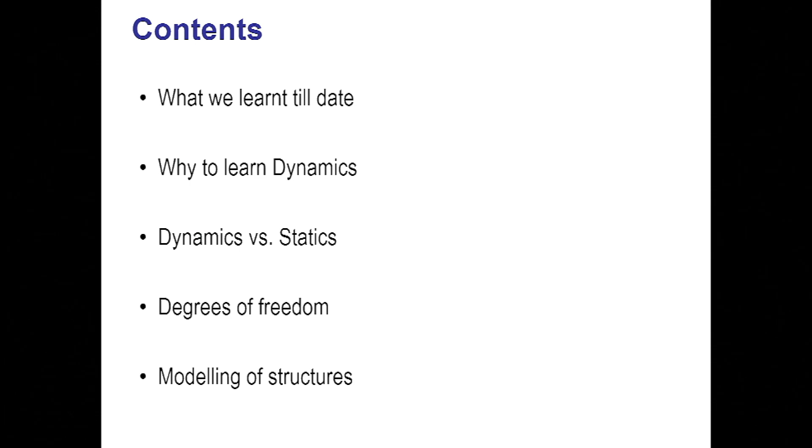Today I am going to cover an introductory topic on structural dynamics. My presentation has the following contents: what we have learned till date, why to learn dynamics, what is the difference between dynamics and statics, what is meant by degrees of freedom, and in the end we will try to cover modeling of the structures. Let us start with what we have learned till date.

Basically structural engineering is divided into two different areas: one is subjects related to analysis, second is subjects related to design. In structural analysis we have learned these many subjects in our UG program, like engineering mechanics, strength of material or mechanics of material, structural analysis 1, structural analysis 2, or in many universities called theory of structures 1 and 2. Then we have learned matrix methods of structural analysis, and then advanced structural analysis.

So after learning so many subjects related to analysis, why do we want to learn another subject related to dynamics, which is also an analysis subject now? Let us see what we have learned in various subjects first, and then we will come to know why there is a need to learn this new subject.

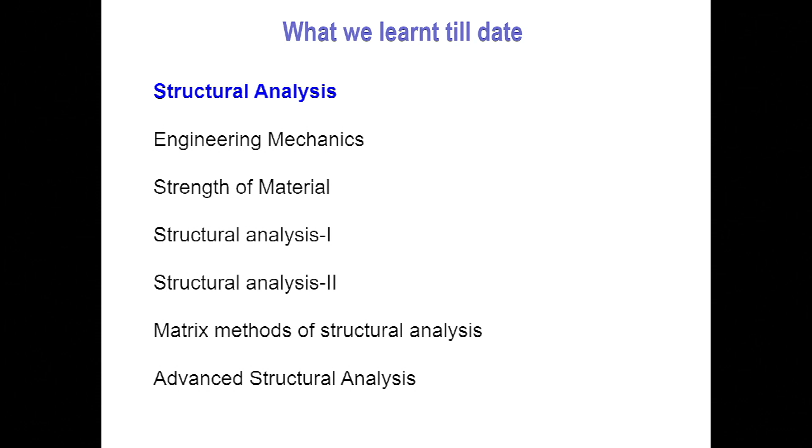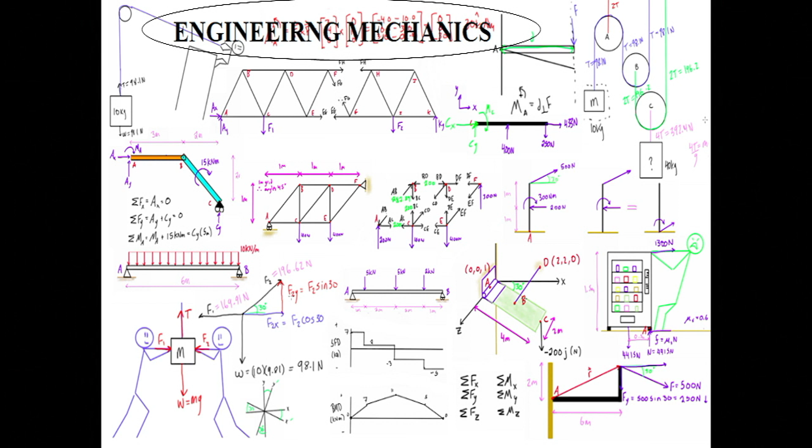In first year you learned a subject called engineering mechanics. In engineering mechanics, our assumption was every body is a rigid body. As you can see in the figure, we tried to find out the reactions of the beam, various forces in the members, and basically what reaction is developed when you apply any kind of force on your material. So the basic assumption was every object is rigid, and whatever force you apply, you get some reactions.

After engineering mechanics, in second year we started to learn strength of materials. In strength of materials we basically try to understand what is happening to the material of various structural elements - what stresses and strains are developed in the material. So the basic assumption was every material is deformable, and we tried to understand what happens to the material when force is applied on a member. That is what we learned in strength of material.

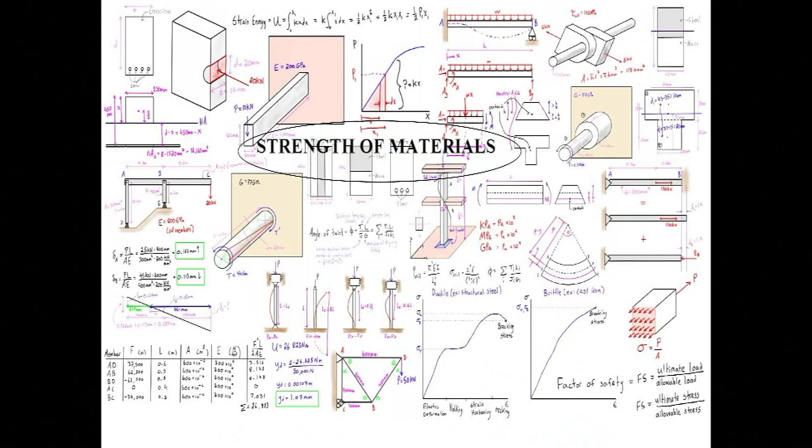Also we learned to analyze determinate structures in strength of material, but that was not sufficient. So in structural analysis we tried to analyze various indeterminate structures like beams, frames, trusses. For this we learned methods like three moment theorem, moment distribution method, Kani's method, strain energy method, but there was one lacuna of all these methods. If you learn three moment theorem, you cannot analyze frames or trusses, only beams. If you use moment distribution method, you can analyze beams and frames, but not trusses. So there was a need of a common method to analyze all kinds of structures.

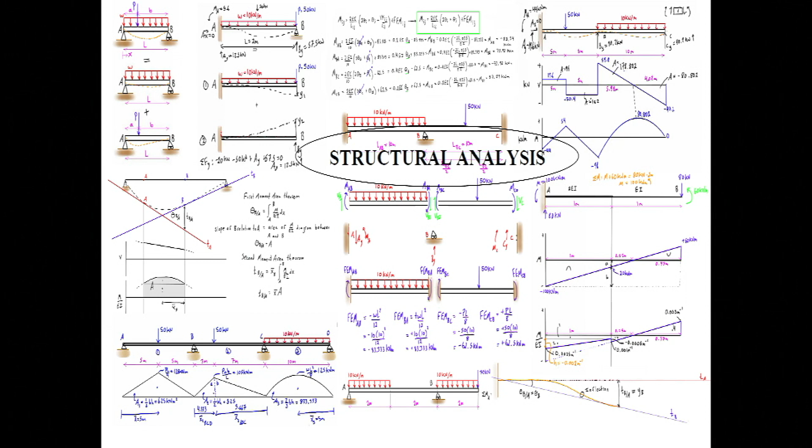Also along with the common method we wanted a programmable method, because nowadays people use various software to do structural analysis. So that is why in the next set of subjects we learned matrix analysis of structure, in which we tried to analyze the structure using matrix methods. We prepared the stiffness matrix of the structure, the displacement vector, the force vector, and then solved those matrices to get the reactions, shear forces, and bending moments developed in those members. After learning all these subjects, today I am going to tell you there is a need for another subject called structural dynamics.

So what is the necessity of this structural dynamics? Because if you look at all these subjects, one thing is common. What is that one thing? In all the subjects your force was stationary, the value of magnitude of that force was constant. So even if you are applying a point load, the value of that point load was constant.

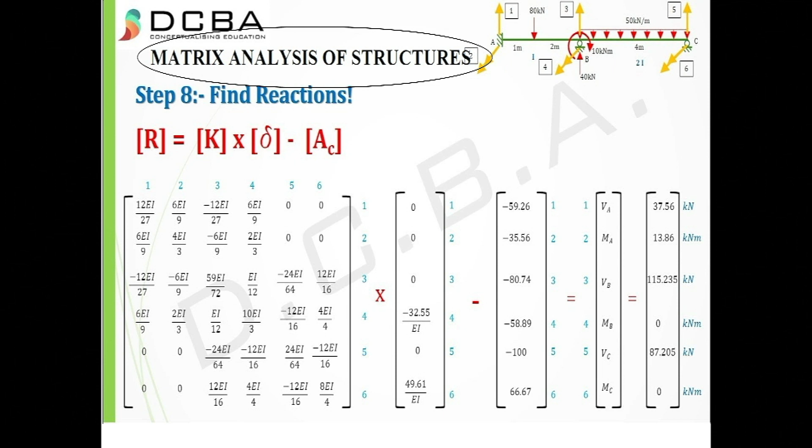Even if you are doing the analysis for uniformly distributed load, the magnitude of that load was constant. But if the force is varying with respect to time, how do we analyze the structure for this time varying force? This is something we have not learned in all these subjects, and there comes the need of structural dynamics.

Why learn dynamics? Because of the quantification of dynamic forces. If your force is varying with respect to time, you should be able to analyze your structure for these time varying forces. So what are the examples of dynamic load?

You must have experienced wind load. If you go to the terrace of your building, you will feel the wind, and you can feel that variation. Wind is not constant for the entire duration of time; the force applied because of wind changes with respect to time. So if you want to analyze your building or structure for wind load, which is varying with time, you cannot do it by the methods you have learned up till date. That is why you need to learn dynamics.

What are other examples of time varying forces? Vehicular load—if you consider a bridge, the load on it continuously varies. Then there is blast load, which is suddenly applied on a building: a huge amount of load acts over a very short duration of time. These kinds of loads are also considered time varying forces.

Another very popular load is earthquake load. If you want to do the seismic analysis of your building, or design it for earthquake forces, you first have to learn the dynamics. You have to learn structural dynamics.

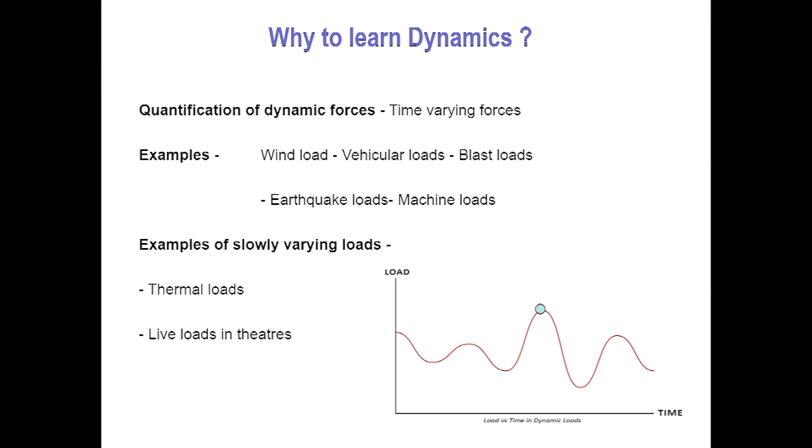Now the next question arises: even if the force is varying with respect to time, why don't we just consider the maximum value of load in the analysis? Look at the figure, which shows a force varying with respect to time. What will happen if I only consider the maximum amount of load and do the analysis as per the methods we've learned till date? Let us try to see why we don't just consider the maximum load.

Because of Newton's second law of motion. Everyone is aware of it: force is equal to mass into acceleration. If a body is moving with certain acceleration, it will continue its motion until it is disturbed by another force. In short, Newton's second law says force equals mass into acceleration.

So if your force is varying with respect to time, it is going to impart acceleration into your body, and when acceleration comes into picture, an additional inertia force will develop in the body, changing the way we look at the structure. In static analysis, nowhere have we considered the inertia force developed in the body, because the force was statically and gradually applied.

If the force is gradually increasing, it is not going to impart acceleration into your structure. But if the force is suddenly applied, or varying with respect to time, changing abruptly, then it will impart acceleration into your structure, and this acceleration introduces another inertia force into the body—this inertia force should be considered in the analysis, and that is why we have to learn structural dynamics.

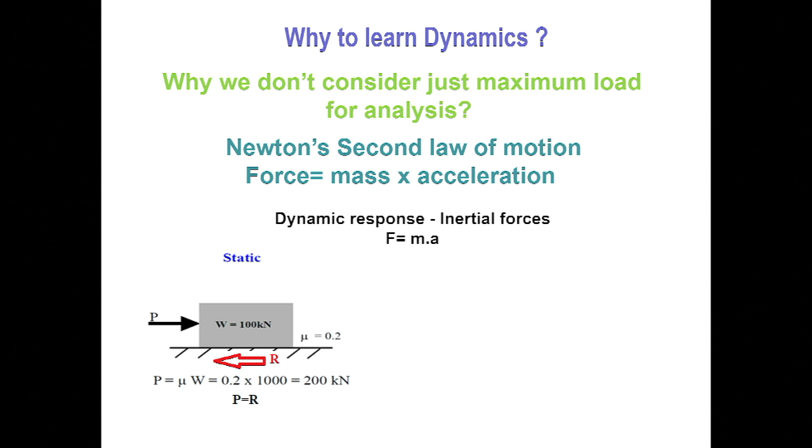Let us say mu is the coefficient of friction, which is 0.2. So when your P will be greater than R, then this block will start to move. If we consider this case as a static case, because your block is stationary, then we can say P is equal to R. How do you calculate R? Mu into W, which is the self-weight of your block.

Now let us say that this block is moving with some uniform acceleration. So what will be our equation when we apply the equilibrium condition? Along with P and R, we will get an additional inertia force into consideration, and that additional inertia force is nothing but mass into acceleration. This acceleration imparted in the body has changed the entire game, and it has changed the way of analyzing the structure, and now your equation will become P equals R plus ma.

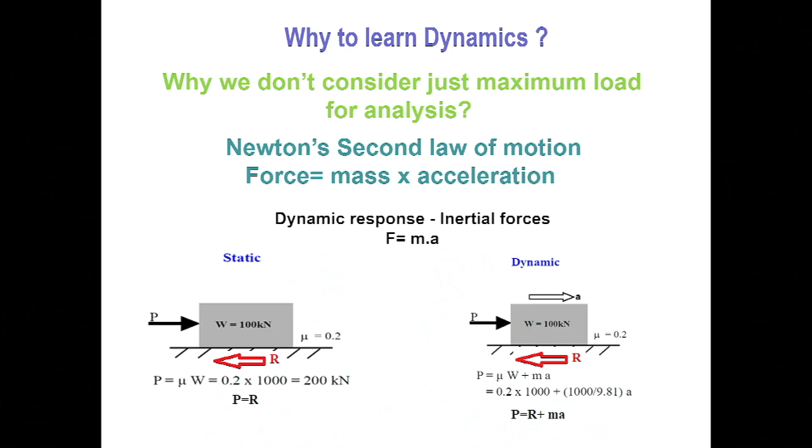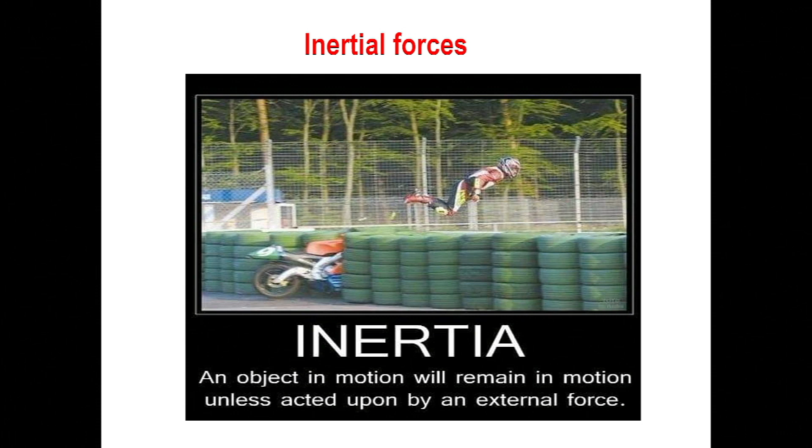This is the impact of inertia forces. Try to understand that when earthquake forces act on your building, how much inertia force will develop in your building, because what is the inertia force? Mass into acceleration. Try to calculate the weight of your building, convert it into mass, and then assume that if some amount of acceleration is induced in your body, what amount of inertia force will develop. You cannot definitely neglect this inertia force in the analysis, and that is why we have to learn structural dynamics.

Now to calculate the inertia force, there is a principle called D'Alembert's principle. Let us try to understand what is D'Alembert's principle. The example of an accelerating body can be considered as an equilibrium problem. So the previous photo that you have seen, we can consider it as an equilibrium problem, but as it is moving, we have to call it a state of equilibrium, which can be referred to as dynamic equilibrium.

In UG you must have learned static equilibrium conditions, because your structure was stationary, the forces acting on the structure were stationary, so we used to call that static equilibrium. But now your structure is moving, your structure is vibrating, and your structure is dynamic, so we are going to call this equilibrium as dynamic equilibrium. So in dynamic equilibrium, P minus R minus ma is equal to 0.

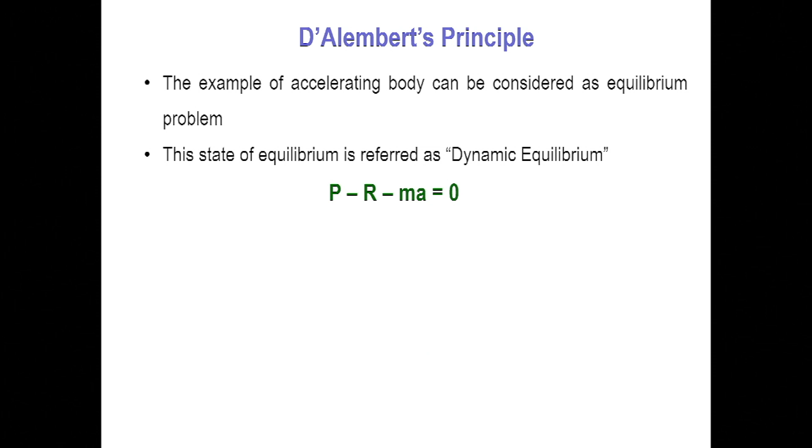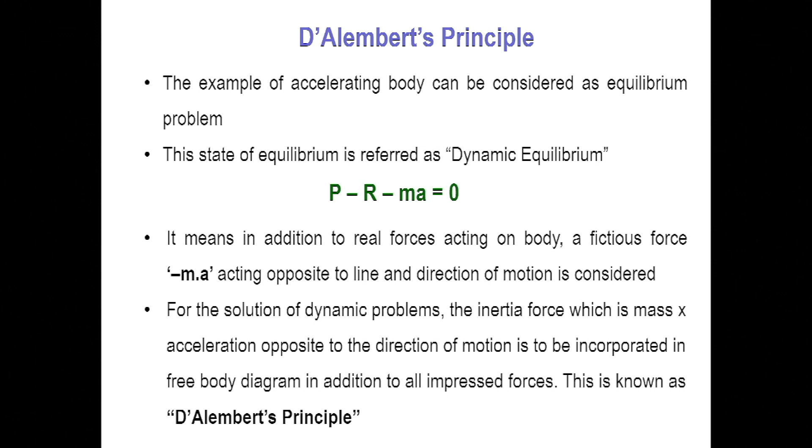When we consider this case as static equilibrium, we get external force equal to the reacting force. But when it is a case of dynamic equilibrium, along with P and R, we have an additional force called inertia force minus ma, which is opposite to the direction of motion, and that is what is stated in D'Alembert's principle: in addition to the real forces acting on a body, a fictitious force of magnitude minus ma acts opposite to the line and direction of motion. This additional force, its inclusion, is nothing but D'Alembert's principle.

Next, what is the difference between dynamics and statics? We have seen that dynamic analysis means an analysis which we are doing for time varying forces. When we consider the static response, time is invariant, because force is constant for the entire duration of time, so time is not considered in static analysis. Another thing is, it is governed by the stiffness of the structure.

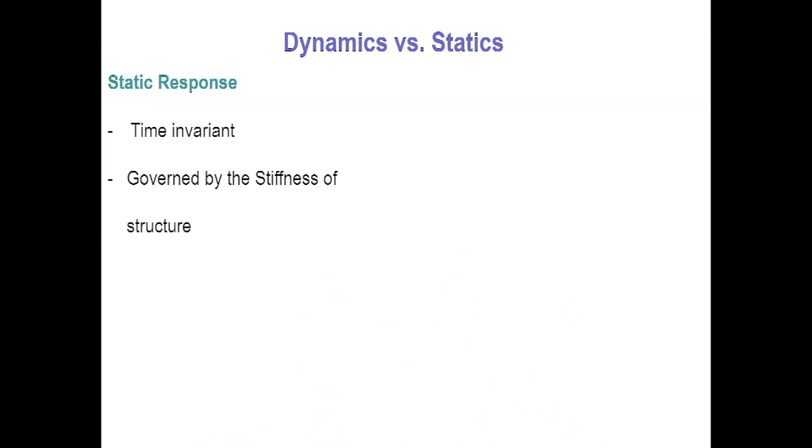This K will represent the stiffness of your structure, and when I apply a force on it, it will get deformed. So what will be the magnitude of force? K into x. Or what will be the displacement? F upon K. So in short, when you go for the static analysis, the response will be governed by only the stiffness of structure. But if you are going for a dynamic analysis, now you know that my force is varying with respect to time.

So if force is varying with respect to time, it means that you are not going to get a single value of displacement. Your displacement will also vary with respect to time, because the force which is acting on your structure is also varying with respect to time. So time is a variant in the dynamic analysis.

So the displacement will be taken care of by the stiffness, while the imparted acceleration will be taken care of by the mass of the structure, and your dynamic equilibrium will be written as m into x double dot plus kx equals 0, where x double dot is nothing but d2x by dt square, the double differentiation of displacement with respect to time, or acceleration. So this is the basic difference between the dynamic analysis and static analysis.

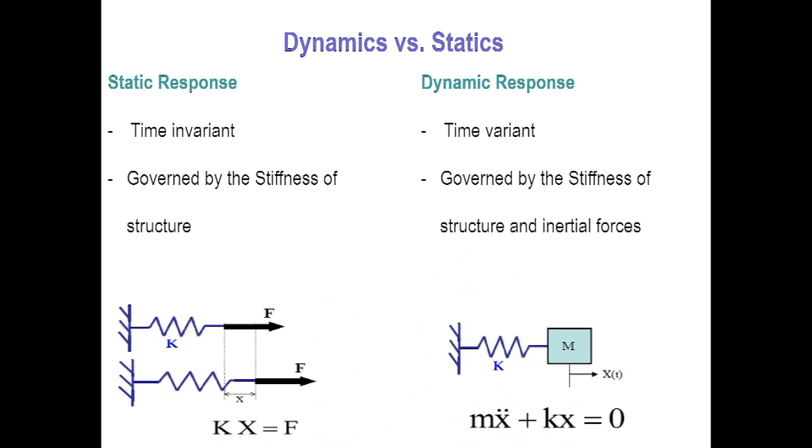So if we go further, we can see that in reality no load is actually a constant force. Even if you want to apply a force on any object, it is going to vary with respect to time, but that variation might be gradual or it might be sudden. So if that variation is gradual, then there is no need to consider that load as a dynamic load. What is the reason? Because the loads are applied during a finite period of time, and if that load is not creating acceleration,

then it means that the inertia force developed in your structure will be negligible, because inertia force is equal to mass into acceleration. If the value of acceleration is smaller, then the value of inertia force will also be smaller, and in that case there is no need to go for the dynamic analysis of structure.

We can correlate this with the experiments you performed in the strength of materials lab. If you remember, you must have performed the tensile test, applying a tensile load on the bar. The load was increased gradually, from 0 to certain amount, 0 to 10, then 10 to 20, 20 to 30, during some stipulated amount of time. So in that case, you can consider that tension test as a static test. You are applying the load statically.

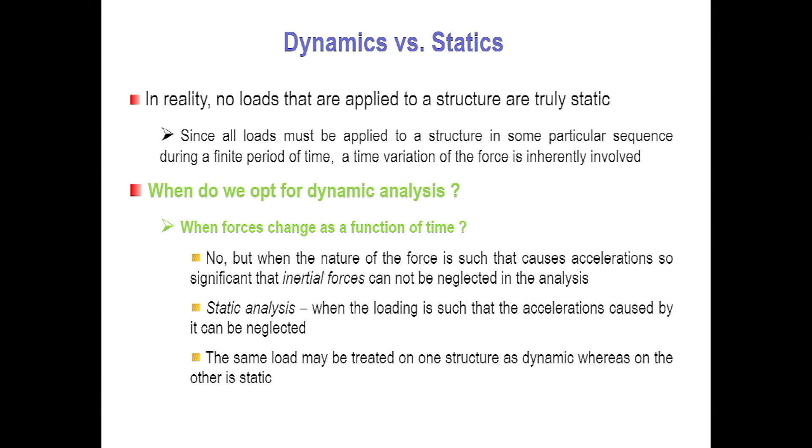When the force changes with time, should we do dynamic analysis? No, it is not necessary that every time your force is changing with respect to time, you should go for dynamic analysis. If that variation is gradual, there is no need, because that variation of force within a certain duration of time is very small. So if a huge amount of force is acting within a short duration of time, then you should go for dynamic analysis.

Again, why don't we do dynamic analysis always? Because every force is varying with respect to time. Then why don't we just learn dynamic analysis? The reason is simple: dynamic analysis is considerably more expensive than static analysis. I am not saying in terms of money, I am saying in terms of computational requirement, the time requirement. Time requirement for dynamic analysis is more compared to static analysis. So it is not necessary that every time you should go for dynamic analysis.

It also requires more skill, knowledge, and a feel for the structural behavior under various types of loading. If you have these things, only then should you go for dynamic analysis. But the most important thing to remember is: if the force is imparting acceleration into your body, only then should you go for dynamic analysis. Otherwise, you can go for static analysis.

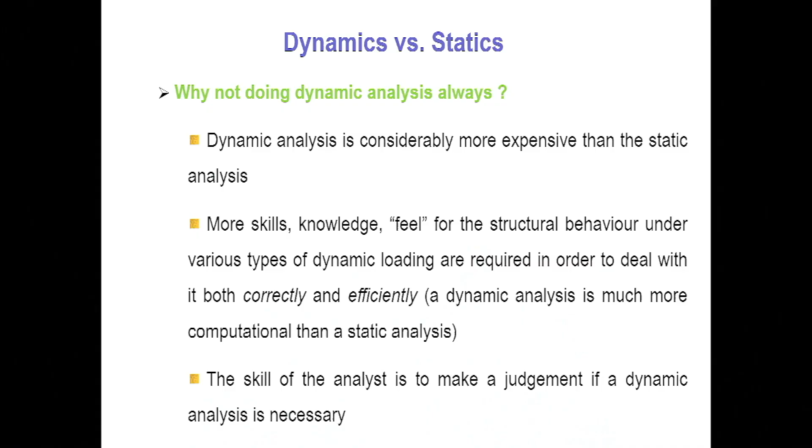Situations in which dynamic loading must be considered: in case of analysis of bridges, because the response of bridge to the moving load is very important. So in this case, you can go for dynamic analysis.

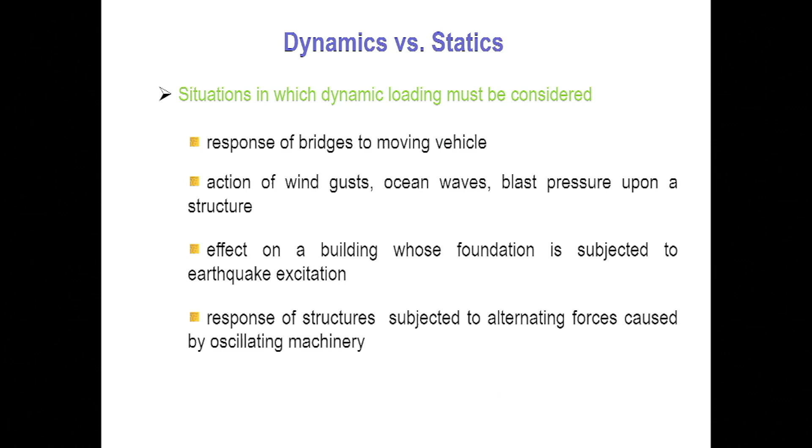Then, action of wind gust, ocean waves, blast pressure on your structure - if these are the kind of forces acting on your structure, then you should definitely go for dynamic analysis. Again, the effect on a building whose foundation is subjected to earthquake excitation - if your building is in an earthquake prone area, you should definitely go for dynamic analysis. And if your structure is subjected to an alternating force caused by an oscillatory machine, then you should go for dynamic analysis.

So these are the situations where you have to go for dynamic analysis. You cannot rely on the results that you have got from static analysis.

Now when you go for dynamic analysis, Newton's laws of motion come into picture - the first law, second law and third law. All of us are aware about these three laws of motion, so I will not read them, because we have learned these from our school days. These three laws are going to govern the dynamic response of our structure.

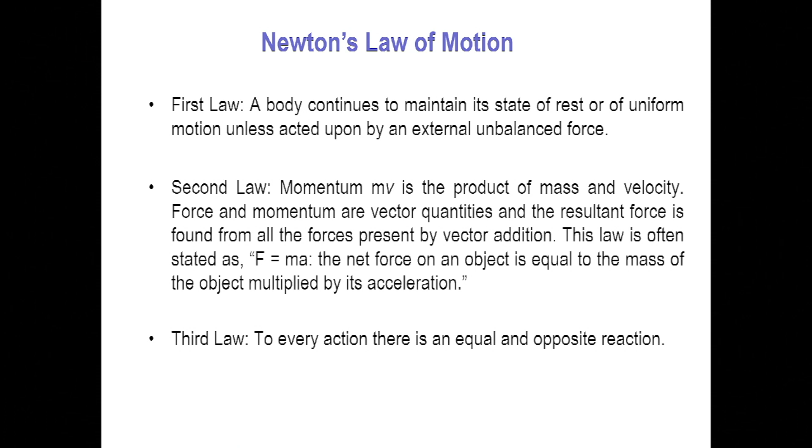So what are the distinctive features of dynamic analysis? Basically, the force is time varying, and the response we are going to get will also be time varying. The response, generally measured in terms of displacement, internal forces, stresses, strains, is also varying with respect to time. So you will not get a fixed value of displacement at any point. As your force is varying with respect to time, you will get different values of displacement for the same forcing function at the same joint. So a dynamic problem does not have a single solution, but a succession of solutions corresponding to all times of interest in the response history.

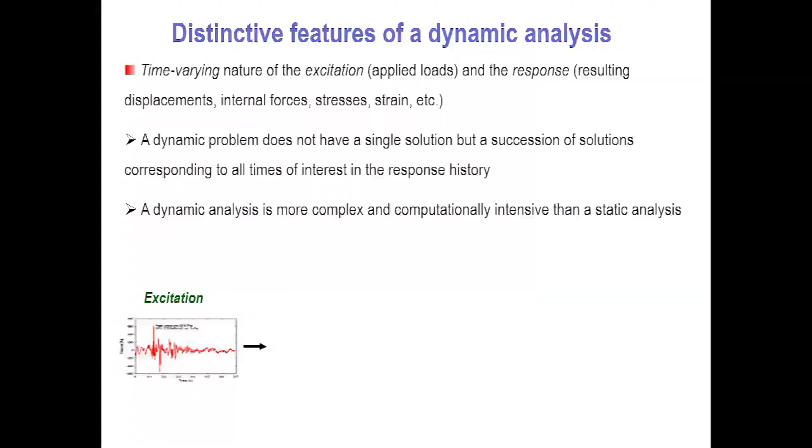So look at this figure. This is how your excitation function is, or how your force will be applied on your structure. And let us say this is your structure - what is the response? You will get a response like this graph, which is varying with respect to time, because the magnitude of force is varying with respect to time. So the displacement, acceleration, velocity that you will get will also vary with respect to time.

And that is why I am saying you cannot go for dynamic analysis in all cases - it requires a huge amount of computational resources and time. So you cannot go for dynamic analysis in simpler structures or where the acceleration is not predominant. But if the acceleration is predominant, you have to do this entire process.

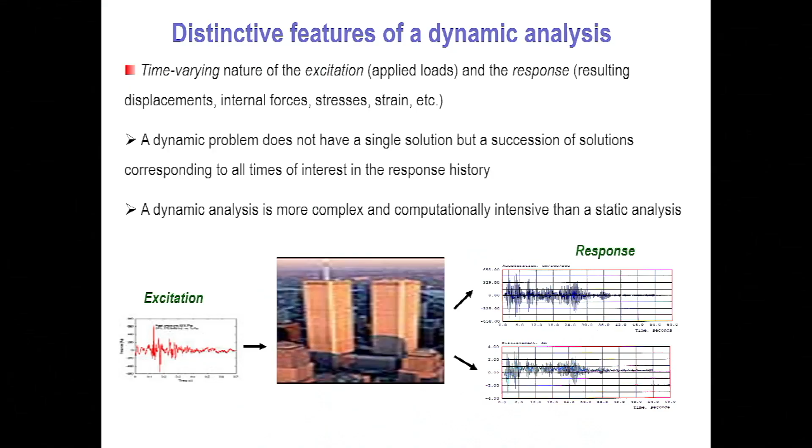Now we have to understand the concept of degrees of freedom. What is meant by degrees of freedom? We know that freedom means the ability to move, right? So the ability to plot the movement of our structure is given by the term degrees of freedom.

Degrees of freedom is the number of independent geometrical coordinates required to completely specify the position of all points on a structure at any instant of time. Say you have applied some force on your structure, so due to that force, your structure is displaced to some other position. Now you want to find out that new position, so you will need some coordinates. Those geometrical coordinates are called degrees of freedom.

Basically these geometrical coordinates are classified into two types: one is linear displacement or translational degrees of freedom, and second is angular displacement or rotational degrees of freedom. We follow the Cartesian coordinate system, which has three axes: x, y, z. So translation or displacement is possible along x, along y, and along z.

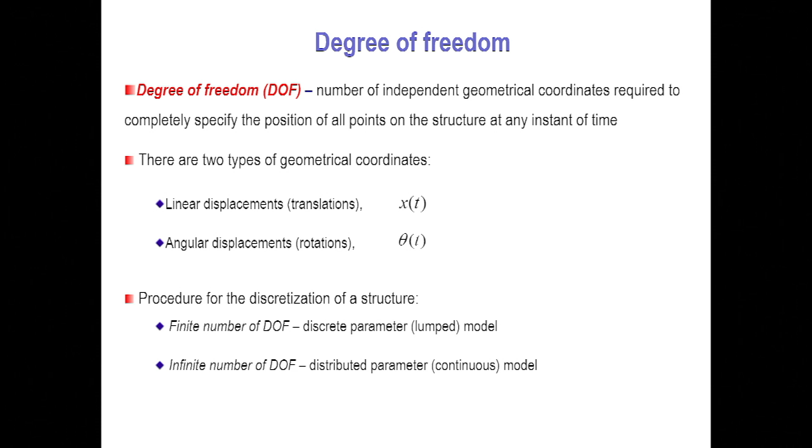So basically your mathematical model will be classified into two types: one is the lumped mass model, which depends upon a finite number of degrees of freedom, and another is the continuous mass model or distributed mass model, which depends upon an infinite number of degrees of freedom. We will see these two types in detail later. I hope you understand the concept of degrees of freedom.

Now comes the picture of modeling of structure. How do you model your structure? Because if you have seen a real time structure, it is 3-dimensional - it has length, width, and depth - but when you do the analysis, you just draw a single line. So how are you drawing a single line when your structure is 3-dimensional? This process of converting your real time structure into a mathematical model is called modeling of structure.

First we will try to understand what is meant by lumped mass model or discrete mass model. The lumped mass model is where you are lumping your entire mass - the mass of the system is assumed to be concentrated or localized at various discrete points. So though my column has weight, though my beam has weight, though my slab has weight, I am trying to localize the entire weight of that floor at some discrete point.

This mass is concentrated at that point, and that point is going to displace in the x direction, y direction, z direction, or rotate about x, about y, and about z. So I am converting the infinite degrees of freedom into some finite degrees of freedom, and that model is called the lumped mass model.

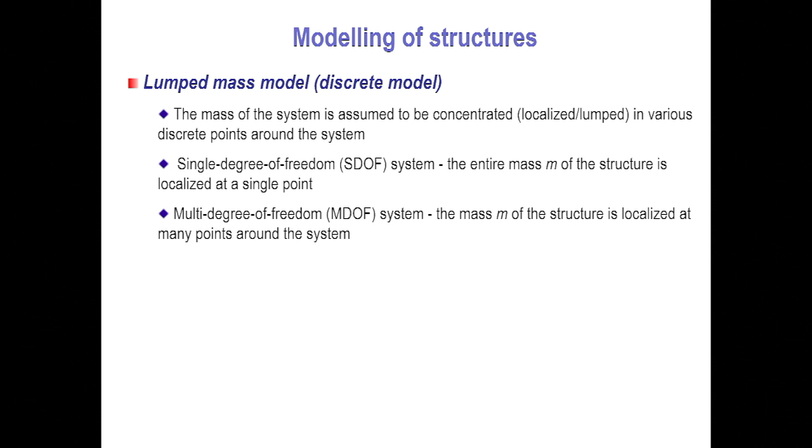So if you are modeling your structure like a single mass, then we will call that structure, or that mathematical model, a single degree of freedom model.

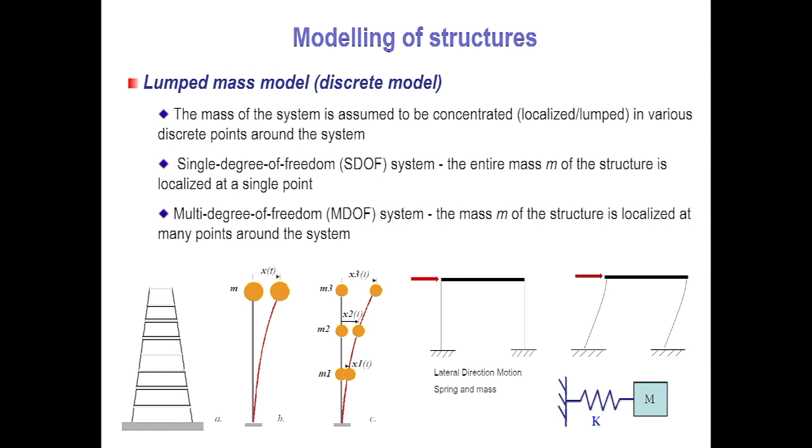So this is your real time structure, and what we have done is say that the entire weight of the structure is localized at the slab level, and we have converted it into a simple block denoting the mass of your structure. Then for stiffness, your columns are deforming, so we calculate the stiffness of the structure and convert it into a single spring. This spring and block will give you the displacement of your structure. Converting your actual structure into a spring-mass model, or any system which can be analyzed easily, is called mathematical modeling of your structure.

So this is one part of your model. Another part is called the distributed model. In the distributed model, we know that each and every point in your column is going to deform, each and every point on your beam is going to deform, each and every point on your slab is going to deform. Deformation will be different for each and every point of your structure. So if you consider that each and every point deforms separately, it means your degrees of freedom will be infinite. So if your mass is distributed along the entire length, we call that model a distributed mass model, or continuous mass model.

In this case, mass is considered uniformly distributed throughout the system, and in reality all structures have infinite degrees of freedom. Using the continuous model you can get better accuracy, but the issue is that if the degrees of freedom are infinite, then the values of displacement, acceleration, and velocity that you get will be infinite, which is very difficult to analyze. But still, with more degrees of freedom, we can achieve better accuracy.

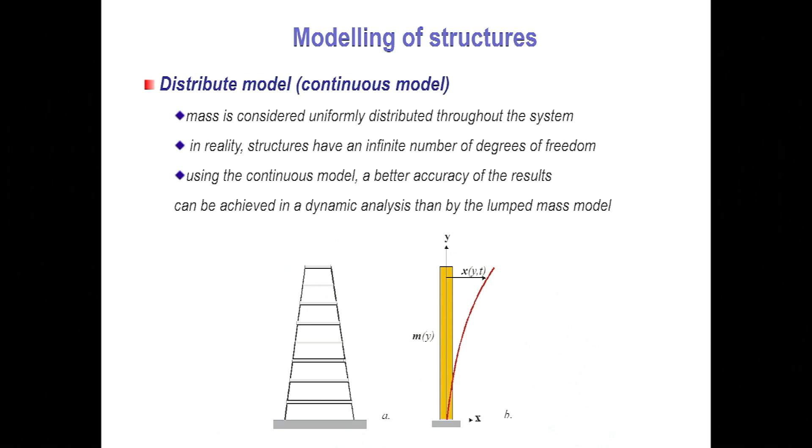So these are the two different models used in structural dynamics. In this class, we first learned what we have studied to date, what the gaps are, and why there is a need to learn dynamics. Then we tried to understand what is meant by degrees of freedom and how degrees of freedom can be useful in converting your actual structure into a mathematical model which can be analyzed easily. The next part of structural dynamics I will cover in the next lecture. Thank you.